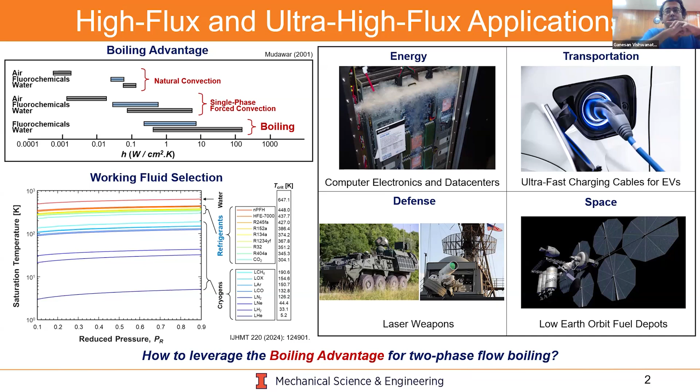Current refrigerant two-phase systems operate at a maximum quality of 0.3 to 0.5. Hence, is there a way to maximize the exit quality and reach something as close as 1, with greater interfacial instability, thereby delaying the CHF? Because if I can do this, then I can truly leverage the boiling advantage.

Nucleate boiling gives the highest heat transfer coefficient, and as I go from nucleate boiling all the way to annular flow, there is convective boiling dominance, which is good in the annular flow region. But there always comes an operational limit where I'm unable to exploit the quality all the way till 1, reaching only 0.7 or 0.5 or 0.8. So is there a way to completely exploit or leverage the boiling advantage to our use?

This is possible by using structured surfaces, which we'll explain in the next slide. To better understand the heat transfer enhancement on a structured surface, let us first consider flow boiling inside a plain tube, but with subcooled inlet conditions. I want to use subcooled inlet conditions so you can see the additional two boiling regimes, the partially developed nucleate boiling and the fully developed nucleate boiling region, in addition to the saturated flow boiling region.

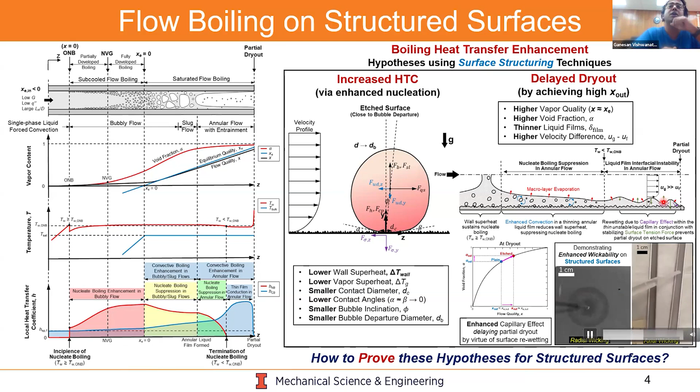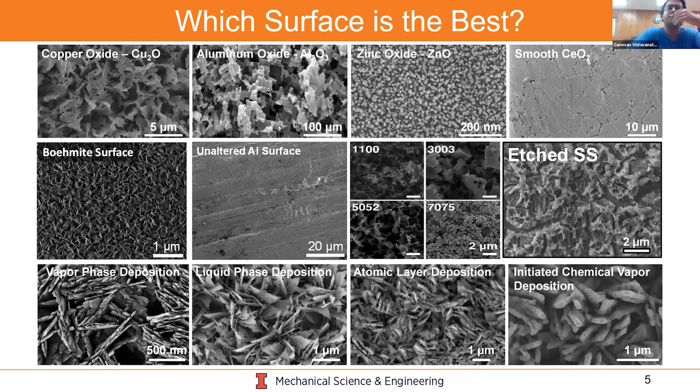So having understood that structured surfaces help us, which surface is the best? We can definitely create various options. In our lab, we have played with a range of surfaces for different materials and different etch chemistries. But how do we come to a conclusion on which surface is the best? For that, we can use the Hsu model, or Hsu-Graham model, however it is taught in colleges, to understand which surface is the best.

The Hsu model determines the range of nucleation sites, or the range of sizes of nucleation sites, that are activated based on two terms. The first term is the available liquid superheat, which is defined in this particular equation. The available liquid superheat is primarily a linearly increasing function, or basically linearly decreasing as you go away from the wall, because you are in the laminar sublayer. The second term you need is the required vapor superheat.

This required vapor superheat is the superheat required to activate the said cavity. With increasing maximum surface feature size, the required vapor superheat also decreases, because as you can see, the required vapor superheat relation actually comes from the Clausius-Clapeyron relation. If you rearrange that, you get that for smaller cavities, you require a very high vapor superheat to nucleate, whereas a larger cavity requires a smaller vapor superheat to nucleate. So hence, as the feature size increases, the required vapor superheat also decreases.

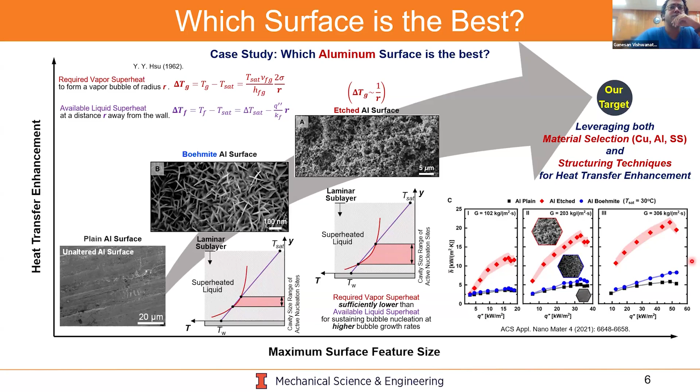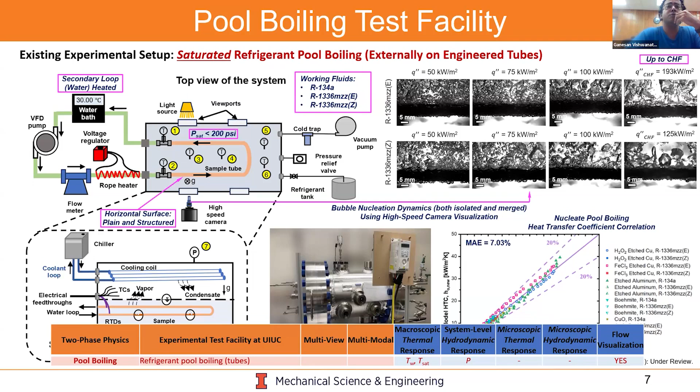Next, we move to the water flow boiling test facility, where we perform saturated water flow boiling tests on both aluminum and copper microstructured surfaces. Here we use externally heated tape heaters on brass blocks to heat these copper or aluminum tubes, which you can see inside. We have a flow visualization test section, which we later use to make or improve a flow regime map. This is the improved version of the Thome flow regime map.

And for this experiment as well, we have these particular macroscopic and microscopic thermal responses. So till now, you don't see any microscopic thermal response or hydrodynamic response that we can get. But what you see is that we can get the macroscopic thermal response from the thermal point of view, and the hydrodynamic response. In the macroscopic thermal response, I just want to point out that we find the thermodynamic equilibrium quality, which is not necessarily the same as the flow quality. We will discuss this more in detail in the subsequent slides.

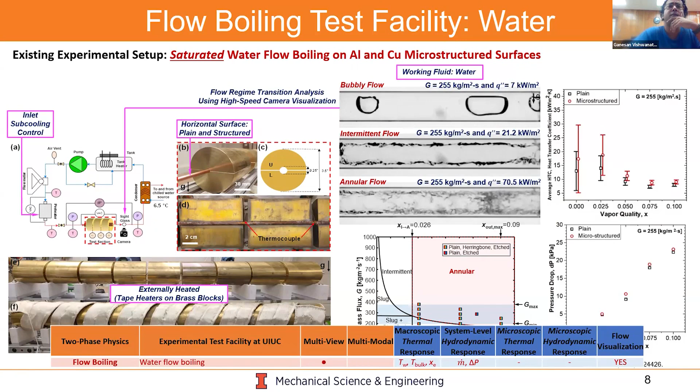Next, we also have a saturated refrigerant flow boiling test facility, where we test for both single component and multi-component, or refrigerant blends. In addition, instead of using a rope heater or tape heater, we use a secondary water loop to heat the refrigerant in the test section.

On the right side, you see snippets of the thermal response we get for all these different working fluids under these operating conditions, for different local vapor qualities, all the way up to dryout-type CHF. At the bottom, we found that of all the frictional pressure gradient correlations, the Friedel correlation, developed in 1979, along with the Lockhart-Martinelli correlation for estimating void fraction, gives us the closest prediction of the hydrodynamic response, which is the pressure drop in this case.

To give some background for the students here: two-phase pressure drop is usually divided into three components—frictional, accelerational, and gravitational pressure drop. Gravitational pressure drop requires the correct void fraction relation. For frictional pressure drop, you need the correct model, either the homogeneous equilibrium model or the separated flow model—Friedel is a separated flow model based relation. Then there's the accelerational pressure drop, primarily due to phase change, which again needs the correct void fraction formulation. So Friedel is the correct form we use for the separated flow model for frictional pressure gradient, and the Lockhart-Martinelli void fraction relation gives the best prediction in this particular case.

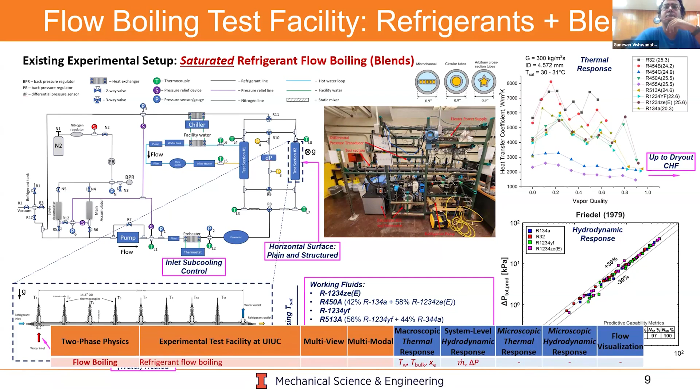In this particular case as well, we are only limited by the macroscopic thermal response, which is the same as what we saw in the previous slide.

So both the prior and most experimental test facilities—I'm just checking the time, I have 30 more minutes—only use or only provide us with macroscopic system level responses that are made available using physical sensors.

As you can see in this slide, for every control variable, which includes the operational variable and the geometric variable, you get the hydrodynamic response shown in most slides as the pressure drop—not local pressure, since that requires multiple pressure taps, and sometimes people only have two, one at the inlet and one at the outlet. Then you get the thermal response, but only macroscopic, in terms of wall temperature and bulk fluid temperature. But the bulk fluid temperature is again just from a simple energy balance, so you're not finding that experimentally either.

When it comes to vapor content response, again you don't find anything experimentally, because most of us don't measure the actual flow quality or actual void fraction, but rather something called the thermodynamic equilibrium quality—quality at any location equals inlet quality plus four times the boiling number times Z over D. In addition, we get the transition point response, both at the onset of nucleate boiling and at critical heat flux.

But despite this, there are still a lot of macroscopic system level response variables that are unavailable. We won't go into detail since that's not part of this presentation, but efforts have to be made to identify these variables as well, because they all talk to each other, and having all this information is necessary.

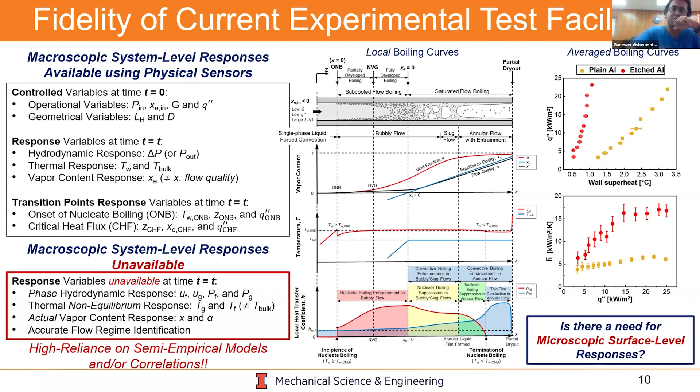So for that, we can take a step back and look at the evolution of predictive tools for flow boiling heat transfer coefficient and dry out determination. From mechanistic models with great physical insights but overly simplified, to data-driven models, and all the way to computational models that rely heavily on the accuracy of near-wall heat transfer and mass transfer physical models, we have gradually been pushing towards unveiling the physics fundamental to flow boiling. It's not just our group, but even at IIT Madras and across the world. Hence, there is definitely a need for high fidelity experiments to develop fundamental understanding of local flow boiling physics. And for this, we need to identify a reliable method to analyze the near wall microscale physics.

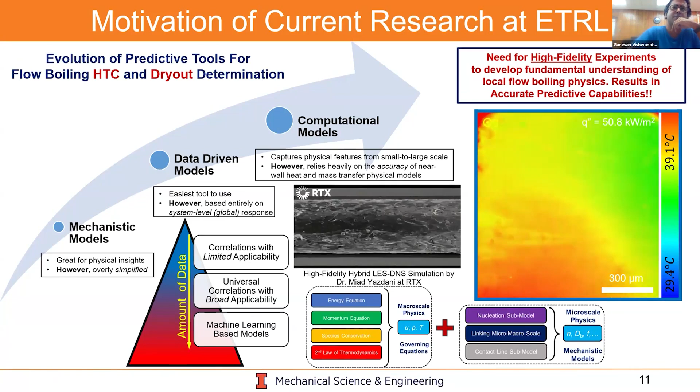This was recently published in Science Advances. To the best of my knowledge, it is, I think, the first and the only flow boiling paper to ever be published in Science Advances. It's a detailed paper with a lot of supplementary information as well. I participated as the second author of this paper. So please do take time later and read into these particular discussions.

So the advantage of boroscopy, in addition to getting the trivial information that we need, which is basically the nucleation site density, the bubble departure frequency, the bubble growth rate, and the bubble departure diameter. So these are the primary response variables that you can get from the boroscopy, as you can see from the figure on the right.

But using this and processing this information, you can even perform something that we did, which is the bubble departure analysis, where we prove that the unsteady growth rate is the dominant force that is actually acting in the downward direction that holds the bubble. And that is the primary force that determines the bubble departure diameter.

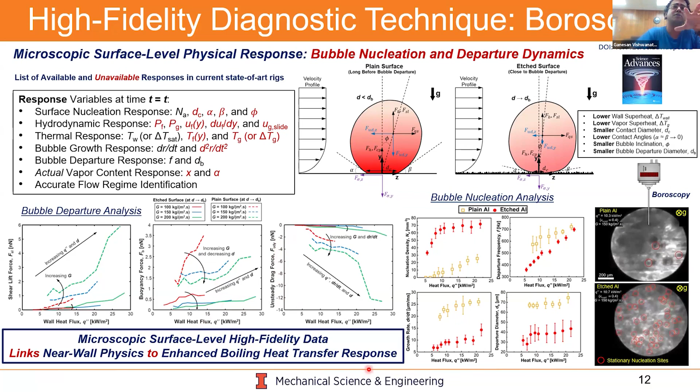Now, with this newly found method, we have modified our refrigerant flow boiling test facility, and we have been using that to analyze a lot of different physics. So one is we do have boroscopy near the inlet to see the fluid physics of isolated bubbles, or the bubble dynamics of isolated bubbles.

And then as you go to midstream, we actually do the flow regime transition analysis in the midstream, where we see when the flow is transitioning from bubbly flow to slug flow all the way to pure annular flow. When I say pure annular flow, remember what I said: when the wall temperature goes below T wall ONB, which means the boiling has completely terminated. And what you should see, as you see here, is pure film. You shouldn't see any bubbles. You should see a pure liquid film.

And using, again, the boroscopy at the downstream location, we also try to unveil the physics unique to structured surfaces on the dry out mechanism. In other words, how is the capillary effect helping in pushing the exit quality, or is it helping in restabilizing the interface that is continuously getting destabilized because of the strong velocity difference across the interface.

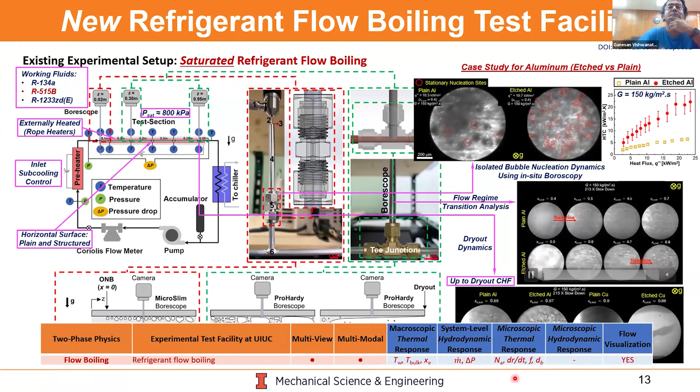So now going into the details, not to spend too much time on this, but feel free to learn from this slide about what kind of boroscope we used. We used two kinds: one is the Hawkeye Pro Micro Slim, primarily because of its lower diameter and lower field of view, which was used in the upstream region to understand the isolated bubble dynamics. And we used the second boroscope, the Hawkeye Pro Hardy, which had a broader field of view, primarily used at the downstream to characterize the flow quality, the flow regime transition, and the dryout.

And like I said, in this presentation I'll be focusing only on R515B as a refrigerant, which is a low GWP fluid.

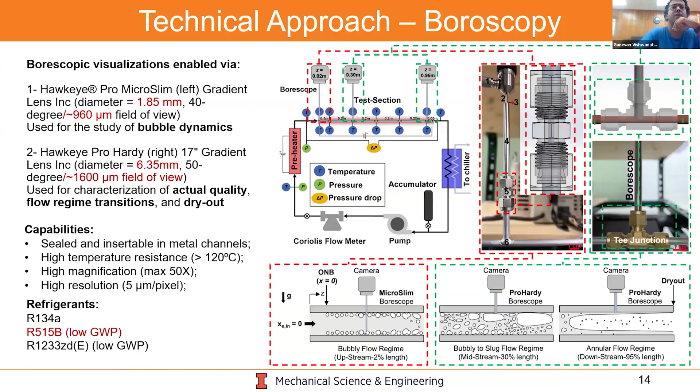Okay, so before we go into the physics unique to structured surfaces, let's look at the preliminary data from the boroscope kept at the upstream condition to understand the isolated bubble dynamics. From the heat transfer enhancement point of view, we observe that the etched aluminum surface boosts heat transfer by 211% by creating smaller and more frequent bubbles and reducing the wall superheat. Remember, the bigger the surface feature size, the lower the vapor superheat required for bubble nucleation, so it nucleates at lower wall superheats.

Next is the bubble dynamics. Etched surfaces have more nucleation sites, obviously, and they have smaller bubbles because they depart at smaller bubble sizes with lower departure frequency and slower growth rate due to the reduced wall superheat and higher wettability. From the force balance point of view, the lower surface tension and the unsteady drag forces on the etched surfaces result in smaller bubble departure diameters. So on etched surfaces, you have lots of small bubbles departing at lower wall superheats, as opposed to, say, water on a plain surface, where you might have a smaller number of larger bubbles departing at higher wall superheats.

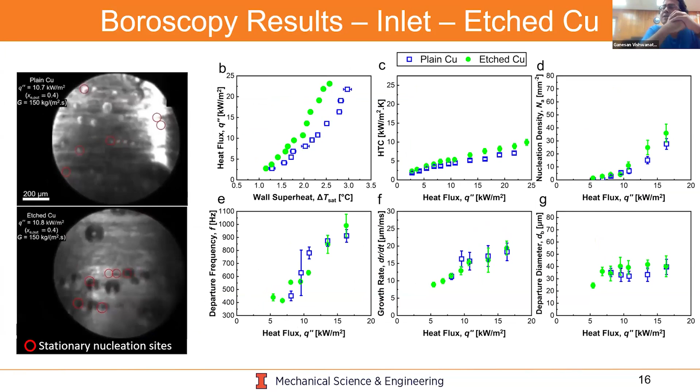Similar observations were also observed on etched copper. But you can see something weird here: I'm not observing the same enhancement in nucleation site density or even the heat transfer coefficient. The plain and the etched surfaces kind of overlap with each other. So why is this? This is something we'll discuss in the subsequent slide. So we have two similar structures with widely different heat transfer coefficient enhancement levels.

We do understand that etched or structured surfaces are hugely dependent on the etch chemistry used to create them, so it's basically surface-driven physics. Material-wise, yes, they are two distinct materials, but the physics aiding both nucleate boiling and surface rewetting in the annular flow region is primarily determined by surface-driven effects. So how do we prove these surface-driven effects?

Like, how shall I prove that etched aluminum was more conducive to creating better nucleation sites, better heat transfer, and better surface rewetting as opposed to etched copper?

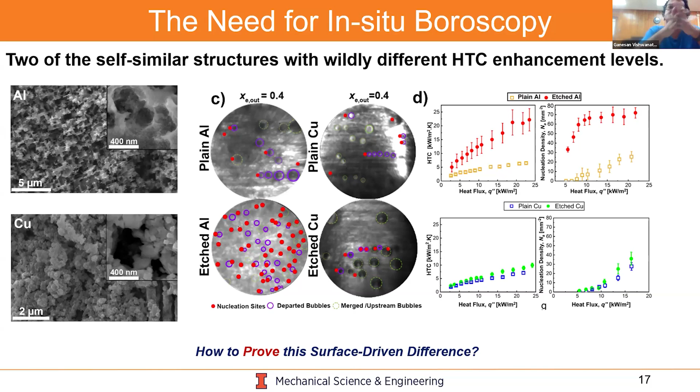So how do we do this? We know there are several traditional surface characterization techniques, from SEM to confocal microscopy to atomic force microscopy. But what do we need here? We need quantitative data on pore size, because remember, I'm talking about cavities. We need quantitative data on pore size to confirm whether the structures on these surfaces are in the optimal size range offered by the Hsu model. Remember, the Hsu model gives you the range of sizes that can be active for a given wall superheat, or for a given condition. So what is the range of sizes?

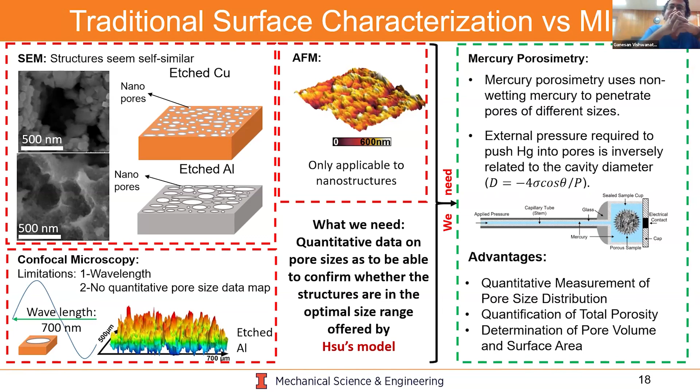For that, we prefer to use the method of mercury porosimetry, because that provides us with quantitative measurement of pore size distribution, quantification of total porosity, pore volume, and determination of pore volume and surface area. So it's about the pores, the cavities.

So here on this particular slide, on the top left and top right, you see the results from the Hsu's model, where for every given wall superheat, you get a range of cavity sizes that the model determines they need. This is the range between sizes that can be activated, these pore sizes or cavity sizes.

So for a given operating condition and for a given R min and R max, we compare with the cumulative volumetric results that we get from the porosimetry, and we find that for the range of cavity sizes we're talking about, there are always pores that exist in the etched aluminum surface in these sizes. That's why its cumulative volume is increasing.

Whereas on the etched copper surface, we find there are some regions where there are no pores at all. You can see the volume it's occupying, as opposed to the volume on the etched aluminum surface. So just making an etched surface is not enough—the chemistry of creating that etched surface should be so good that you can create those pores or cavities that you can exploit for both nucleation and later for interfacial stability, for pushing the exit quality.

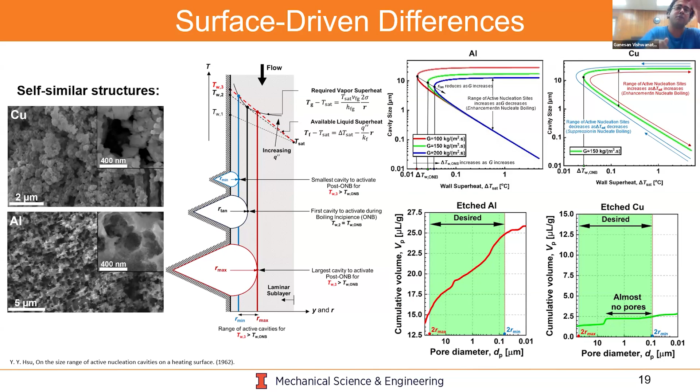I have 12 minutes. Yeah.

So here I want to take a step back, because although this is not part of this particular lecture, I want everyone to understand, especially the students here, what is the big difference between the thermodynamic equilibrium quality and the actual non-equilibrium quality.

Actual quality, or flow quality, is basically the ratio of m dot g by m dot—the vapor mass flow rate divided by total mass flow rate. But in reality, when people use the word quality, they use it very loosely, and they use the thermodynamic equilibrium quality, XE, and define it as the quality, but that's definitely not true. The relation that equalizes it is basically the energy balance.

So the enthalpy that you get from energy balance can be the same as the enthalpy defined using equilibrium quality, and that can also be the same as the enthalpy defined using the actual quality. The equilibrium quality is pretty straightforward: HF plus X HFG, or 1 minus XE into HF plus XE into HG.

Then when you come to the non-equilibrium part, you introduce the non-equilibrium effect. What is the non-equilibrium effect? It is the liquid superheating effect, it is the vapor superheating effect, meaning the vapor temperature and liquid temperature are not in thermal equilibrium. In saturated flow boiling, your bulk temperature from energy balance may be at Tsat, but your vapor temperature might not be at Tsat—it might have higher superheating.

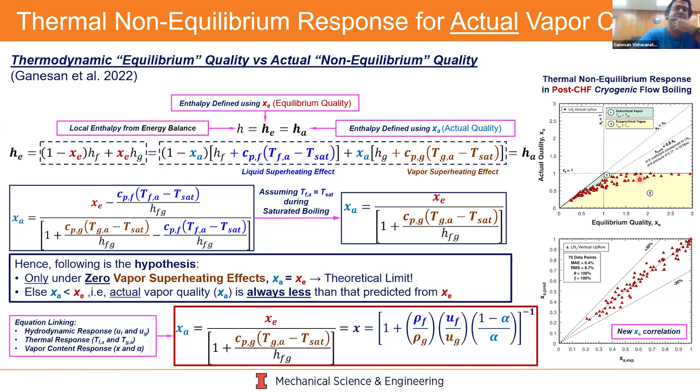So why did I bring up this topic? It's because we actually proved this hypothesis at UIUC. In this slide, we show that we indeed get higher actual quality on the etched surface, where the actual quality, XA, is reaching its theoretical maximum, that is XE. This is possible due to the bubbles nucleating and departing at lower wall superheats. If the bubble is departing at lower wall superheats, why should it remain attached to the wall?

It is growing and departing at lower vapor superheat or lower wall superheat, so more bubbles are getting departed, and hence you are reaching the theoretical maxima of quality, where there is very little vapor superheating. This is possible due to the bubbles nucleating and departing at lower wall superheats, ergo lower vapor superheats, due to the increase in the cavity sizes, which reduce the vapor superheat required for boiling.

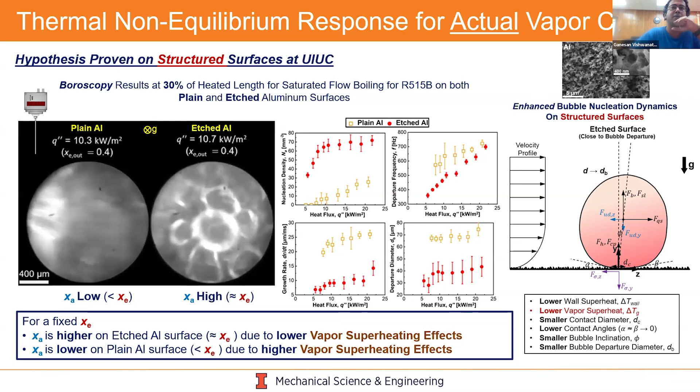Now, next, as we go to the subsequent borescopy regions, we also observe the boiling suppression region and the flow regime transition region.

Oh, the video is not playing. One minute. Or is it playing? Okay.

So the thing is, like I said, we observe the transition to the pure annular flow occurs when the wall temperature reaches below T wall ONB.

So we do observe -- I think the video is not playing. Now it's playing. Okay.

So we do observe that on an etched surface, we are able to delay the transition to pure annular flow all the way till the end, because the T wall ONB itself is less. So as the wall temperature is decreasing, it's like, as long as your wall temperature is still higher than T wall ONB, it will still nucleate, and help you with the nucleate boiling heat transfer coefficient. And it goes all the way till the end, until the wall temperature goes below T wall ONB, and then it can't help with nucleate boiling.

But don't worry, we still have re-wetting effects, because we have a capillary effect that occurs when there's interfacial instability, or de-wetting of the surface -- then the contact line would move closer and keep re-wetting the surface. So hence we can push the quality towards 1. Of course it won't ever reach 1, but you can push it towards 1, and at the same time leverage or exploit the nucleate boiling advantage that the fluid offers for this particular application.

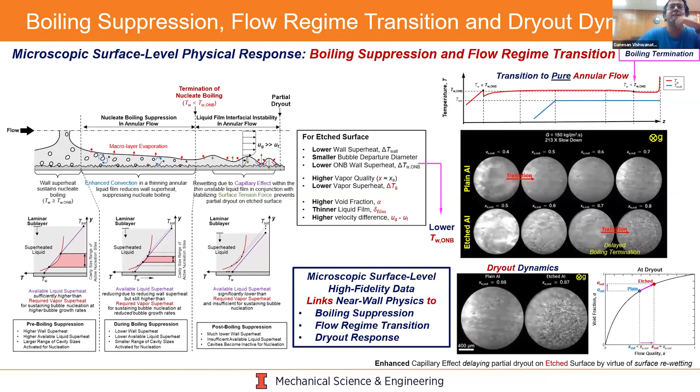So now, coming to the last few slides, here is where I have 5 minutes remaining.

So here is where I would quickly go through this project that we are working on in collaboration with Raytheon in the United States. It's a proprietary code of theirs, so we don't have access to that, but I can definitely give you an overview of what we are actually doing.

So we are leveraging both the experimental and the computational capabilities to come up with a computational model that relies not only on the macroscopic physics, but also on the microscopic physics. How do we give that? We give it to them by using our confocal microscopy and mercury porosimetry, and all those metrology techniques, to give them the surface feature physics. In addition to the bubble dynamics physics, like the bubble departure diameter, the nucleation site density, bubble departure frequency -- all of this we give to them, and then they are able to

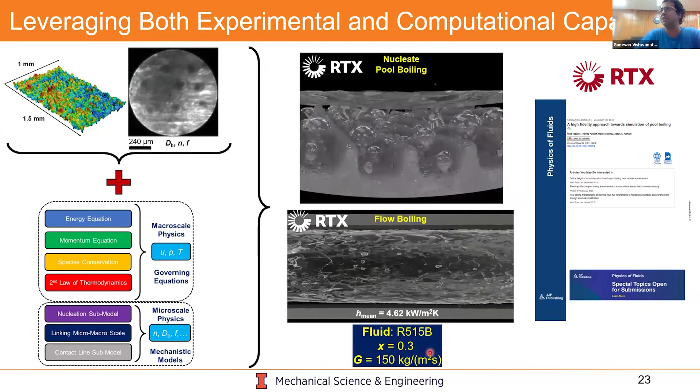simulate both the nucleate pool boiling physics and even the flow boiling physics, which in this particular case is mostly convective boiling driven, because you don't see any nucleate boiling here. It's at a high quality region, not nucleate boiling physics.

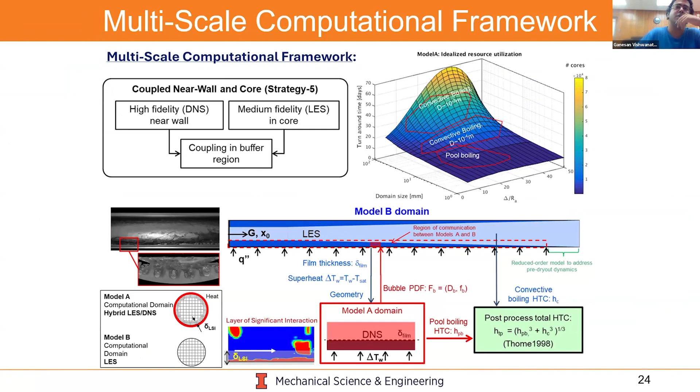So how this multi-scale computational framework works is we basically do a DNS-LES coupled simulation, where near the wall we have an adaptive mesh refinement technique -- we use DNS simulations near the wall, and as you go away from the wall, it goes to the LES formulation. Overall it uses the volume of fluid equation, because that is the single component two phase equation being solved in this particular case.

For certain details, the information of the surface is fed to the simulation using a statistical representation of surface roughness, where basically we give them two values -- this is like a Gaussian distribution that they get, and what we give them is the standard deviation and the mean surface roughness information. Based on that, they have a near-wall DNS simulation, and as they go far field away from the wall, they go to an LES formulation.

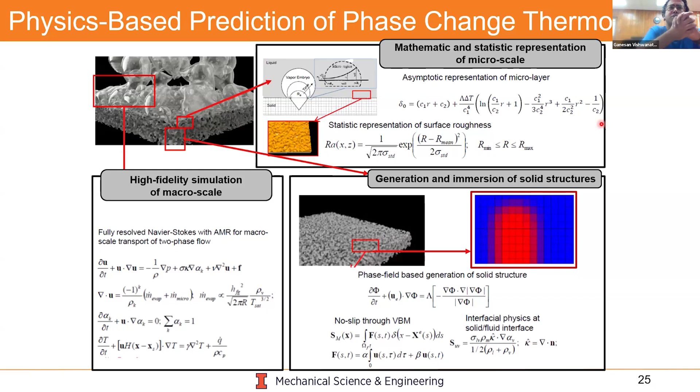But all in all, it uses the volume of fluid formulation to solve the heat and mass transfer across two-phase flows. So this is one of the model results we currently have for adiabatic two-phase flow, because adiabatic two-phase flow is important for flow visualization, since it's definitely not being heated unless you have an ITO coated heating setup. In this particular case, I'm not discussing that, but we are working on it. Here it's adiabatic, just a flow visualizing section.

So we compare that with the experimental data that we have. You see the simulation on the left, experimental result on the right.

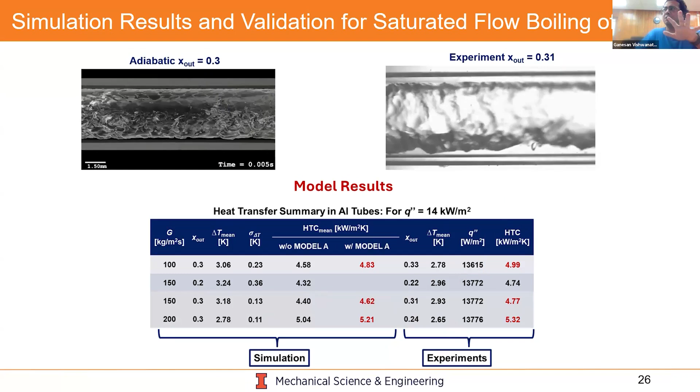And we are also testing it for diabatic systems, meaning heat transfer or heat flux is being provided. We compare the experimental wall temperatures to the predicted wall temperatures, or the predicted heat transfer coefficients in this case. The comparisons are reasonable, but we are still in the process of publishing this work. That process is ongoing.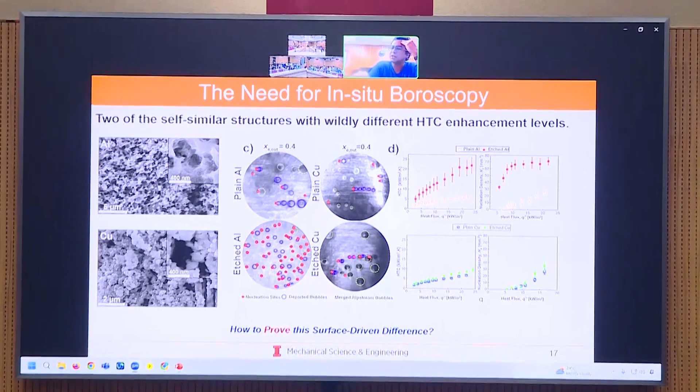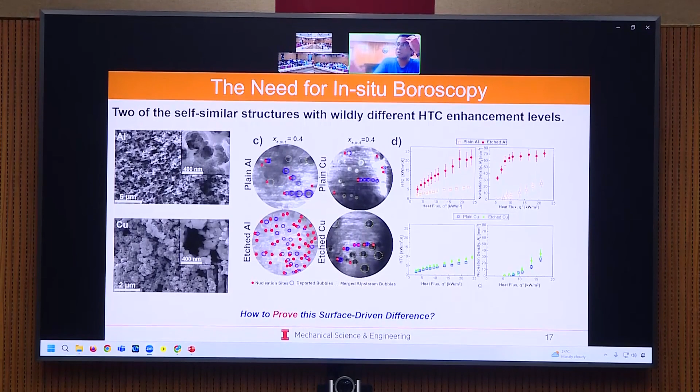So what kind of predictive models do you use when it comes to the modeling? Because you presented also very nicely simulations which seem to fit very nicely to your experiments, but it's extremely difficult to have a predictive active nucleation site model. I agree with that. So I think you might be aware of MURI, the multi-university research initiative. We are part of a MURI project where we collaborate with Professor Yoonjin Won at University of California, Irvine, and Professor Bucci at MIT. So what we are doing is using machine learning in a way.

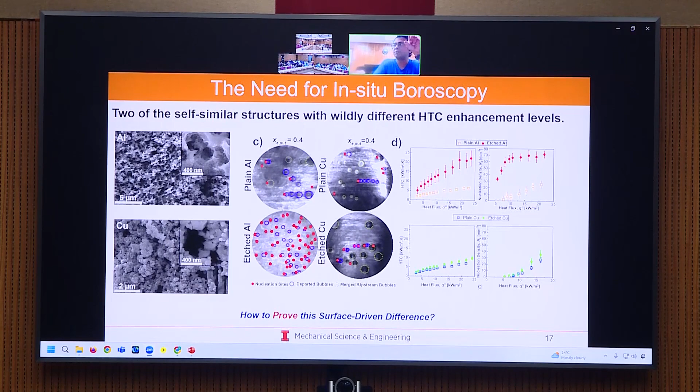So we are, again, I should be careful because machine learning is more like training, so you still need information to train the models correctly. But we are using this high fidelity technique, which is the boroscopy technique that I presented. Like I showed you in the very early slide, I didn't go into the details because that was not part of this particular presentation, but we are also using this slide.

There's a nucleation submodel. So what kind of nucleation submodel do you use as a predictive model? Oh, you're talking about the computational side? Okay, so I'm not so privy to the details because Raytheon has those codes with them. But what I'm aware is that they are using, I think Professor Dhir had some model for the micro layer thickness. It was some kind of a fourth order ODE or certain equations. But what they have done is that they've used a method of moving asymptotes, an asymptotic variation.

That's the question - to get the active nucleation site density, it's before the bubble is there, it's the initiation of the bubble. Active nucleation site density is the most important thing, as we saw. I think predicting the initial nucleation is a major challenge.

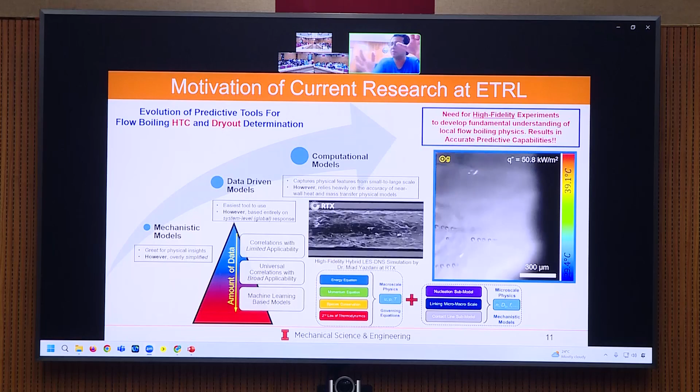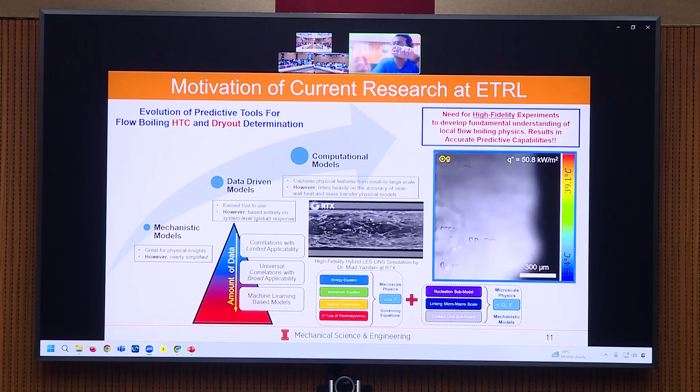Right, so Professor, if you remember in the slide, I told you some information we give to the model. We actually give, based on our high fidelity or whichever fidelity experiments that we have using boroscopy, a representative nucleation site density, or the number of nucleation sites per millimeter cube or per millimeter square in this particular surface - how many of the nucleation sites are getting nucleated, with the mean surface roughness and standard deviation using the profile for the surface. So that information is provided.

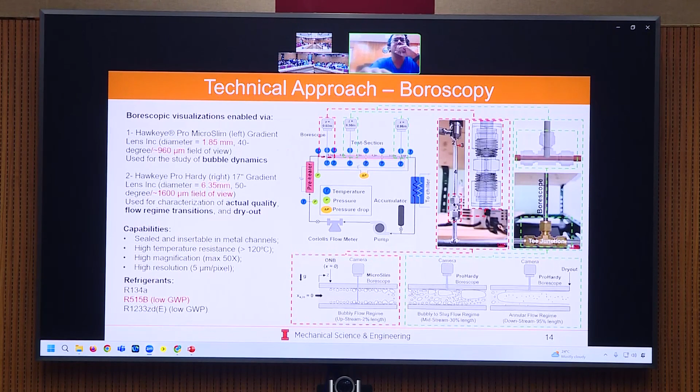Here. So this information we give, where N here is the nucleation site density - we give this information to the model, and then they are able, that's why this computational model is later going to be even used for structured surfaces, because I don't think there is any current predictive or semi-empirical model that is tuned for structured surfaces. It might be for plain surfaces. But here is where we are doing the synergy of bringing in some information and then seeding it, or feeding it, to the model and seeing how it evolves and how it is able to find the physics at steady state, or basically at every time step till it reaches steady state.

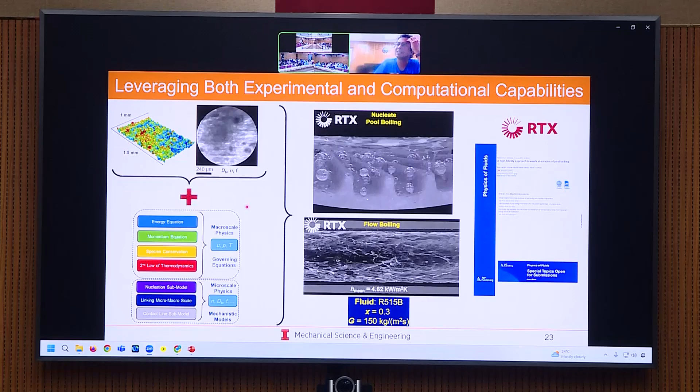So I have... you have to be a little louder, maybe the microphone has to come front, maybe these microphones have to pick up here. So Professor, you're able to hear me? I can hear you, yeah.

So my question is specifically with respect to the modeling choices that you made. You mentioned that you are using DNS close to the boundaries in the flow boiling case, and LES inwards. Is there any specific reason for this choice?

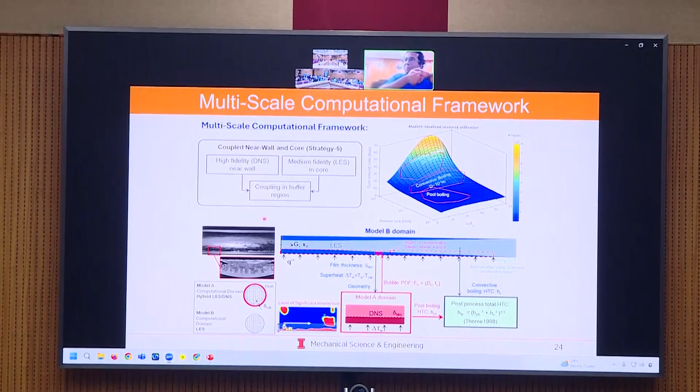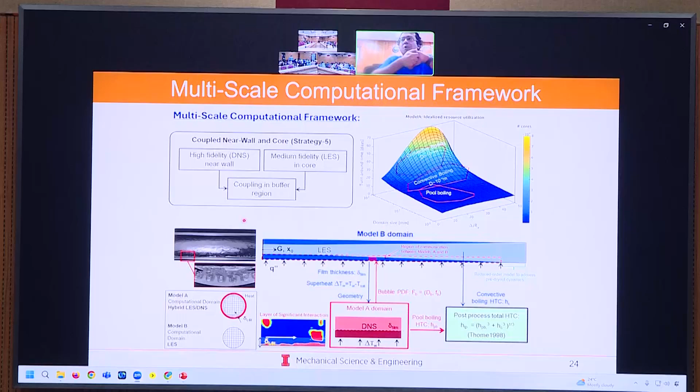Yeah, the reason is the feature sizes, because boiling is a multi-scale physics, and as you go closer to the wall, you see different scales of bubbles, and the flow physics is much more complex for boiling. Since we know boiling is occurring near the wall, that's where we need higher resolution. As we go far away from the wall, it's primarily macro scale physics where you still have evaporation, but not boiling. It's just evaporation - the bubbles are going and phase changes occur along the interface. But it's the boiling physics that is most difficult to capture, and that's why DNS only near the wall.

So my question is, since you are using the VOF also, so you are resolving the interfaces also - in the future, should we see a DNS at the core of the pipe also? Do you feel LES is enough or do we have to move towards DNS?

I would say LES should be enough, mainly because we know that volume of fluid is very good for free surface flows. That's why people, when they do film boiling simulations, they don't worry about anything because it's a free surface - we have a free interface and just macroscopic mass transfer happening across the interface. It's only when you come to the microscopic scales, especially near the wall where you have boiling physics, that's where the issue is.

Both, of course, from computational time they want to save the computational resources, so they make use of adaptive mesh refinement. But in addition to that, I still feel we don't need it, probably - but again for this problem. If you have a problem like atomization, where the multi-scale physics isn't necessarily there - there's no wall anymore, the jet is coming through a nozzle and it's atomizing - in that case maybe you need DNS all the way through the entire flow field. But here, since it's boiling, in my humble opinion, I feel it should be only near the wall.

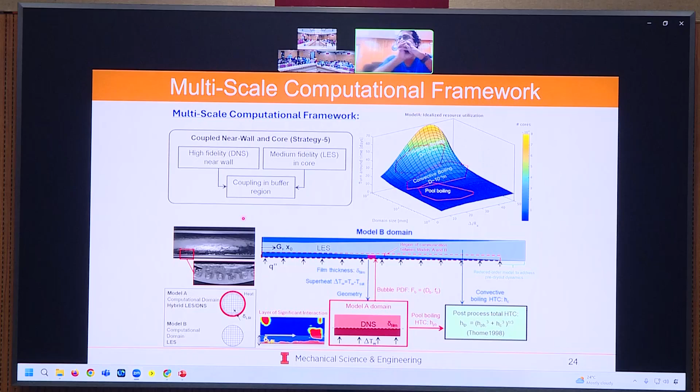Thank you for this very interesting presentation. I think after 30 years in the field, there is something that is always constant in boiling: we have plus minus 30% accuracy in predictions. Mainly the reason is that boiling is a stochastic phenomenon, so you are not able to track down all the possible variables and features of the surfaces and so on. So at the end, we are always landing...

We are very deep in trying to have very good measurement techniques and so on, but at the end the prediction we can do is always plus minus 30%, in the best case. This is, for example - I just wrote a review paper about the fact that CNT, the classical nucleation theory, is not working for most cases. Another point is that what you said about nanoscale phenomena is really important, but it's becoming really unpredictable because we cannot see the bubbles at 3 nanometers, but they are really the beginning of the boil. So what's happening at that scale - it's not really a question, it's more a comment - we are doing very accurate experiments, but at the end we have this output of plus minus 30%, which is still there.

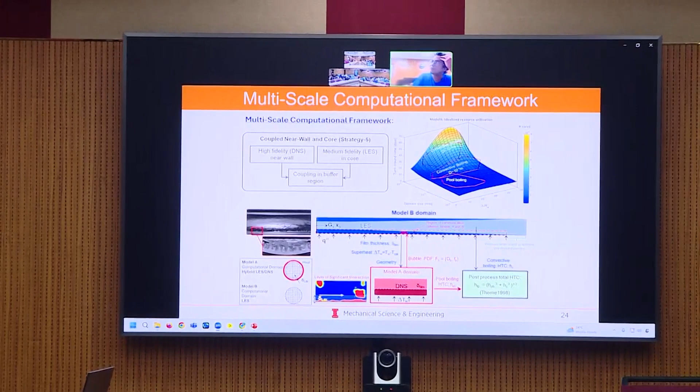Just to add to Professor's point, this might interest you: at UIUC we've been trying to use AFM technique because there you can go to nanoscale. It's risky, but we are trying to see just before nucleation, slowly heating. We have an AFM setup where we can put water and heat it, not with a traditional heater but one built in with a heated base that has constant temperature feedback. So we are trying to see, on any substrate, just before nucleation, can we observe these nanobubbles, and whether some genesis can be observed there. Since you've been so kind sharing your views, I should mention that at UIUC, Professor Ninad and I, and our whole boiling team, are thinking of working on that as well.

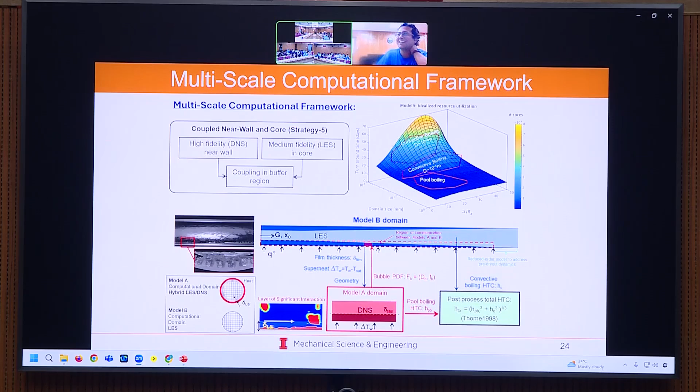I can add that our stochastic fluid dynamics simulations are showing that even one single nano spot, a very small difference in the domain, changes the situation completely. One single spot of 2 nanometers is enough to change the condition at 1 or 2 microns. That's really what you observe with the borescope, because your borescope might be 5 microns per pixel, so you can only detect the bubble when it's 20 microns. So it's really 1,000 or even 10,000 times bigger than what's happening at the nanoscale.

I agree. Thank you so much for your insights, it was really nice, thank you.

Vishwanath, I have one question. You were talking about instabilities in flow boiling, and the results you primarily showed are for large size channels. Did you also use these etched surfaces on smaller channels, like mini channels and micro channels? And did you do it?

Beautiful question, Professor, and we are doing that. Some things I can envision are confinement effects, because with too much vapor production, it can most probably happen that the order of magnitude of the bubble size is the same as the order of magnitude of the channel size. Then you can get confinement effects where the liquid has no place to go and wet the surface, and you get a premature CHF, or other instabilities that we know. So we are doing that, though it's not part of this particular lecture, but we are planning to do it.

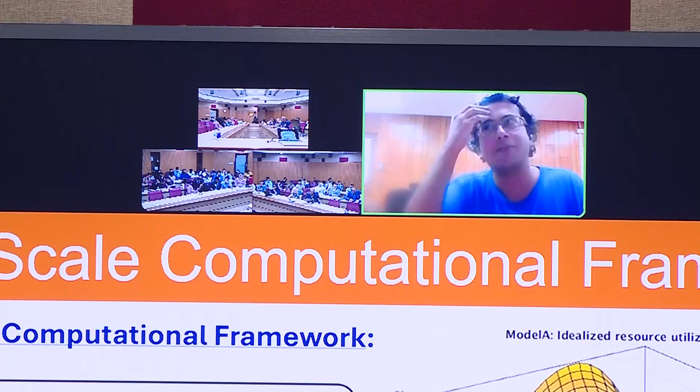It is part of the MURI project, where we are testing this on different length scales. It's an ongoing project. I don't have the results right now because so far they were still at the macro scale level, but at smaller scales there will definitely be a problem. That's where the idea is how to tune these surfaces.

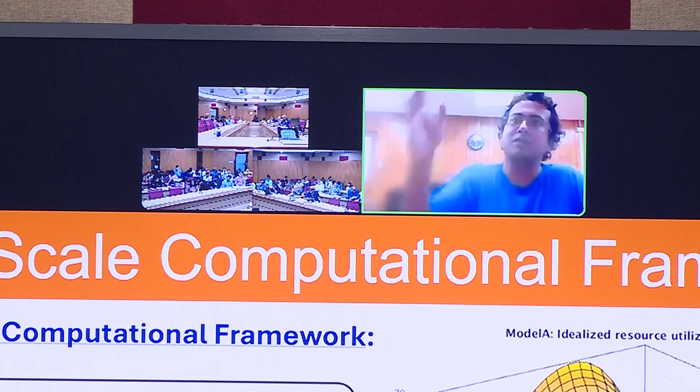Very beautiful point, because there's no single answer here. When I say use an etched surface, there's a question: what if I have a small diameter? Can this same etched recipe give me what I want? It might give high heat transfer coefficient initially, but then with this huge creation of bubbles, suddenly it coalesces, creates a confinement effect, and gives premature CHF. So did I win or did I lose?

At the end of the day, it's a holistic answer one should give, and that's one of the objectives of the MURI project, where we're trying to do a series of experiments on different channel sizes, different structures, different fluids. We're actually building a universal flow boiling test rig, with different inclinations and flow orientations, to get all this data, and like Professor said, error percentage is always around 30%, but try to at least get physical insights on the proposed design criteria we'd like to give to the audience.

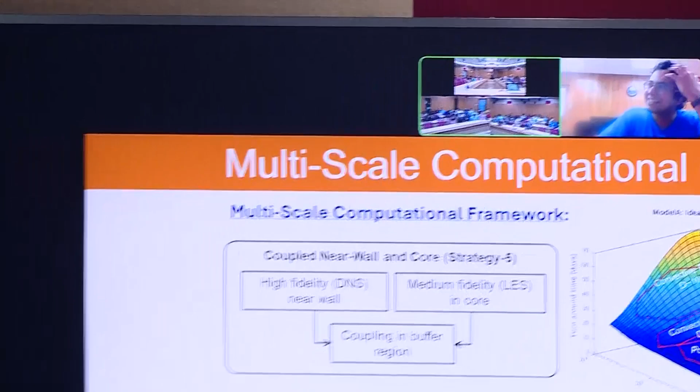Thank you very much, Vishwanath. In fact, some of these open-ended problems are required for us to hold future workshops on this topic; otherwise there's nothing more to do in this. We'll come again, yes, yes. So thank you again. Let us give a round of applause.